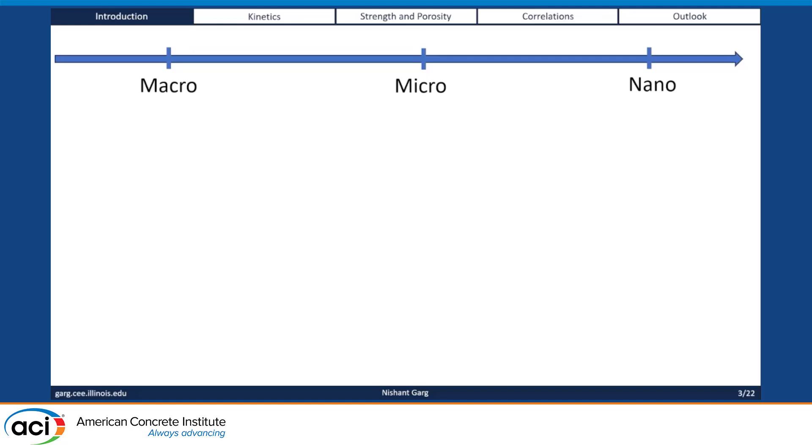All right, so let's get started with the technical things here. So we know that when we talk about different scales, we can have macro, micro, and nano, and macro is what gets used and placed in the real world.

Then micro is, if we consider the cement ingredient of concrete, it's really kind of a micron-sized material, and it's a mixture of, I like to call it, many different spices. It's a single-looking spice, but it's a mixture of many different spices, all micron-sized.

And then you can also go to the nanoscale. I don't have a picture for the nanoscale because you can't really see the nanoscale material, but I do promise you later on I do have some TEM images of some of these CSH seeds that we collected recently.

Our group has done a lot of work on the micro size, so I'm going to spend a few slides talking about it. There's a technique that we've been working on for almost now 5 years, which is Raman imaging. How it works is essentially you start off with this optical image of an aggregate of a granite rock specimen.

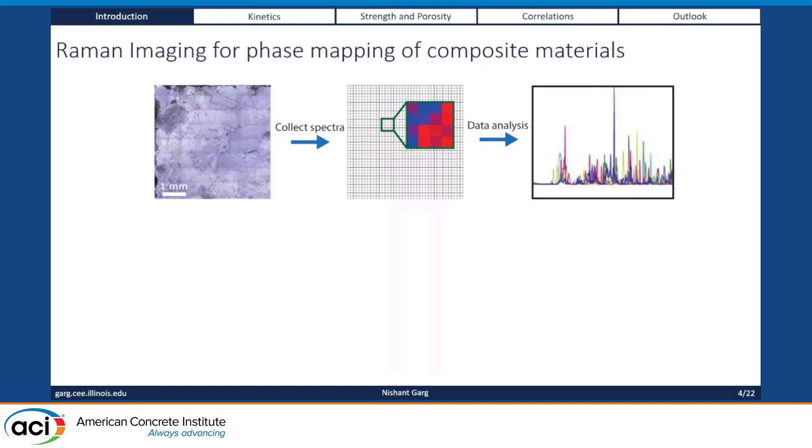And what you do is that you basically take these point by point, grid-like fashion spectra at different points in this map. And then you get a representative spectra at every location. This spectra you can then categorize and assign to different phases that are present, to get direct mineral information.

So kind of very similar to SEM EDS, but instead of getting elements, you get mineral phases directly. And then you can have a spatial distribution. The colors represent the different phases that are present. So in this case, you have quartz, feldspars, and so on that are in this aggregate.

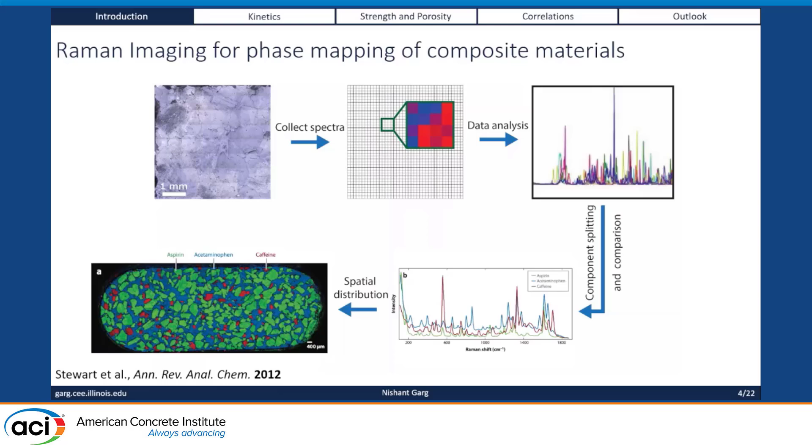And this is actually routinely done in many other industries. So here's an example, and I'm just going to blow it up here. Since I'm in the middle of a semester, right after this talk, I have to go and teach a class. So I'm going to ask you some questions here.

Can anybody guess what this material is? I can bet many of you have put this material in your mouth at some point in your life. Excedrin, right? So this is an over-the-counter decongestant, over-the-counter painkiller, or Excedrin.

You can see clearly you have aspirin, you have acetaminophen, which is Tylenol, and then you have caffeine. So the pharmaceutical industry already uses techniques like this to not only quantify the ingredients that they have in a system, in a pill - this is a cross-section of a pill - so that they have quality control, but also to see the spatial distribution.

So again, if they had bad quality control, and if all the caffeine was on one side of the pill, and if you're somebody like me who just breaks the pill in half and only takes half of it, I'll just get high on caffeine and not get the Tylenol, right?

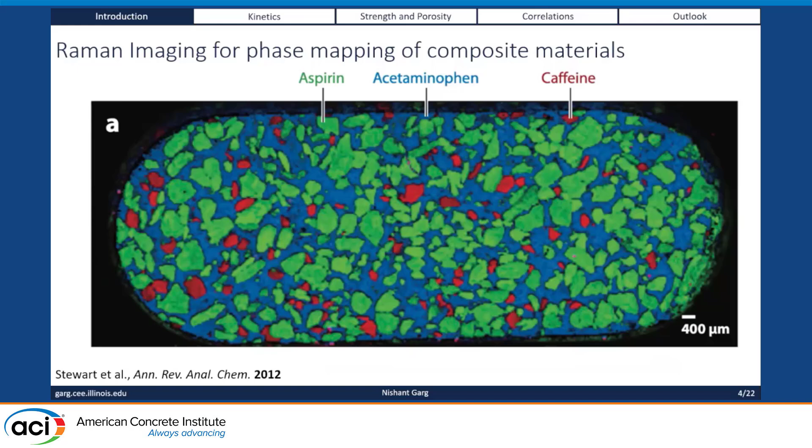Which you need when you're sick. So what we thought, well, why don't we do the same thing on cement? And people have been doing that with SEM-EDS for a long time. We want to do this with Raman imaging and see what we can get.

So we make this kind of a little pill, which is essentially cement embedded in epoxy. We get this very high resolution Raman image. We can quantify most of the phases. Each of these images that you're looking at has 250,000 pixels in it. So it's a really high resolution image at a large area, 5 millimeters by 5 millimeters, which gives us statistics that it can then correlate with the bulk XRD measurements.

We did this on a variety of 11 different cements from the US. We get a decent correlation. And we can then start to obtain these very interesting phase-specific maps, right?

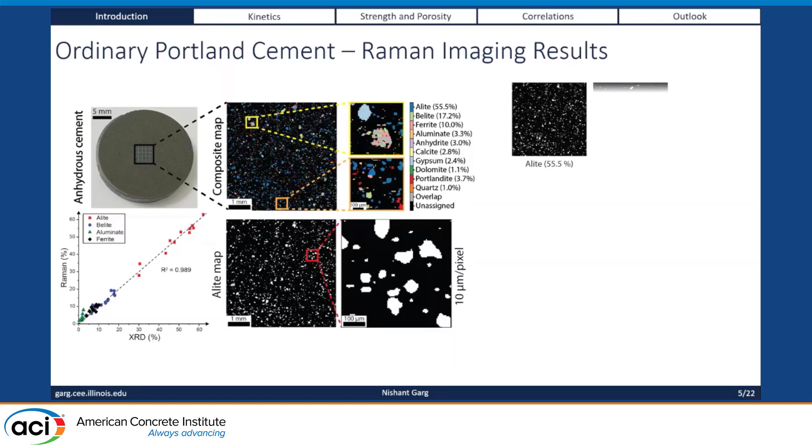So if you look at this here, you have now the alite map. This is a zoomed in version on the right here. You can start to see the individual alite grains in the system. It's kind of like looking at a Google map, and you're zooming in to that specific location. And then you can obtain all these different maps for all individual phases, even down to something like quartz, which is at the order of 1%, and you can quantify it, okay?

All right, another quiz, and you may get extra credit for this. Can anybody guess what phase is this?

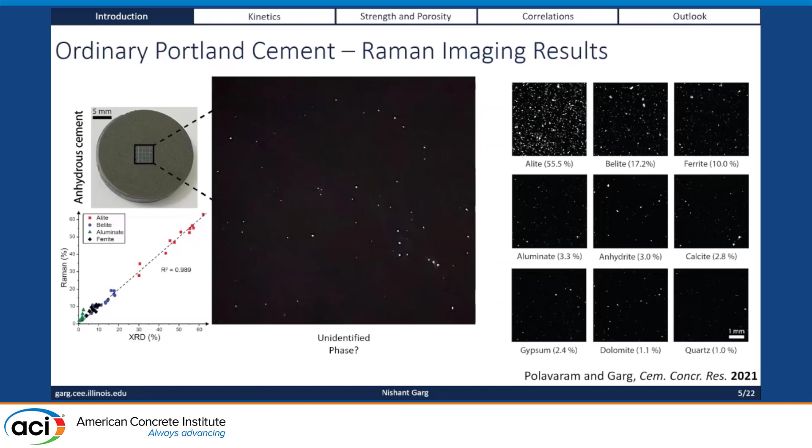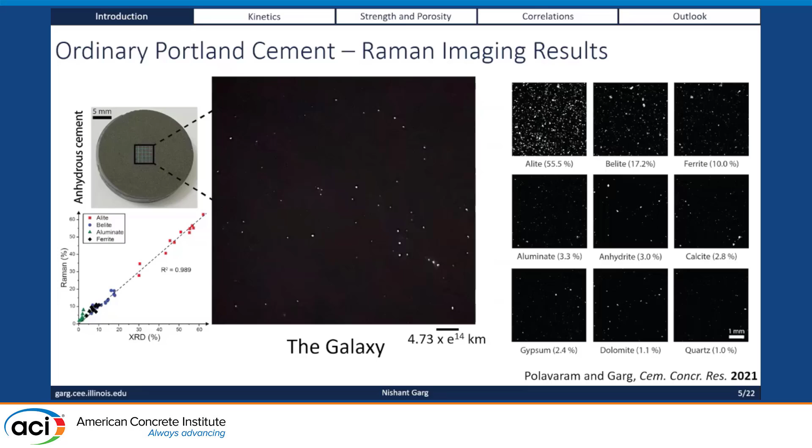So again, this is a bit of a tricky one. This is actually not a Raman image. This is actually an iPhone photo of the night sky that my student took. You can see that this is kind of very similar to what astronomers do. In this picture, the white pixels are the stars, but what we have in the Raman image are the stars of the clinker, the clinker phases. So what else can we get out of this?

Well, you can actually get the size and shape distribution now of individual clinker phases. Again, this is just a short animation of going through the different phases that are distributed in this image. And then you can quantify this through image analysis, and you can get what we call the phase-specific particle size distributions, right? So instead of having a global PSD, you can get the PSD for each component within the cement, all the way from alite down to calcite or quartz.

And the interesting thing for me now, the next thing I'm thinking about is, we hear a lot about type 1L cements and the variability and so on. It is possible, hypothetically, you could have two type 1L cements with the same amount of limestone, 10% limestone, but depending on the grinding done at the different plants, the fineness of the limestone in one cement could be different from the other, and depending on the PSD curve, you could have different water demand and different strength. So that's something that would be very exciting to figure out. So if you want to collaborate on that, just let me know. I'm looking to get more cement samples.

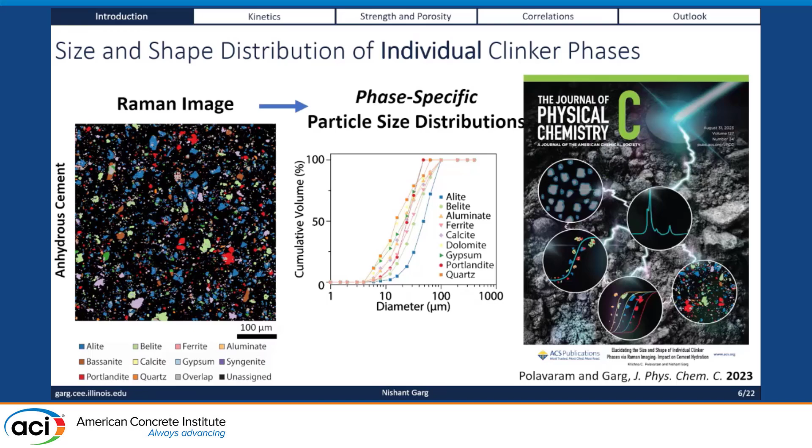Then you can get all sorts of other things. You can look at the shape. You can generally see that belite has a lower aspect ratio than alite, and we know that belite is generally rounder because it's softer, so it gets ground up like that, and we can now quantify that. This work came out last year in JPCC. It made it on the cover, so we are really looking forward to take it from here.

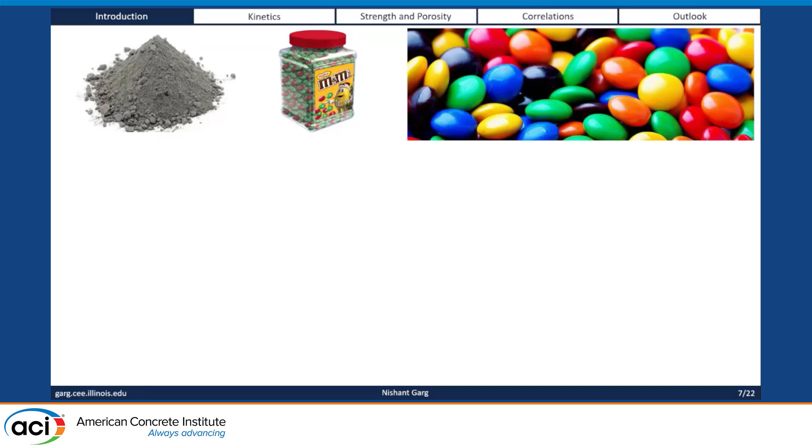How can we better understand this? I was trying to explain this to my kids, and I thought M&Ms would be a good way to explain them. If you think about cement as a box of M&Ms, you can think of all the cement phases as these different colored M&Ms. Here, you can think of them all being equal size and equally distributed, but in reality, they're kind of random, different sizes, different shapes, and different orientations.

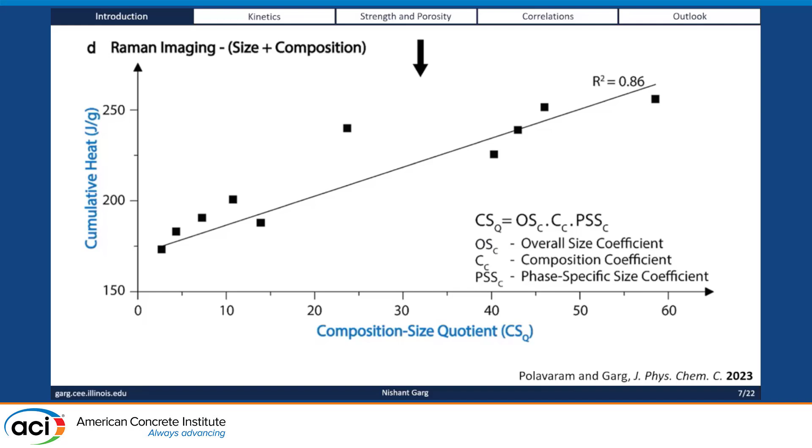Okay, I come back to the nano, and I know the session is about the nano, so I want to spend some time there, but I think there's a lot of room for optimization at the micro scale.

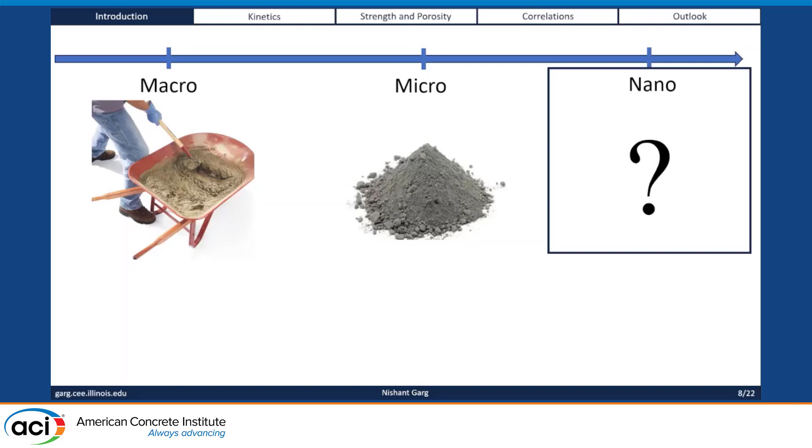If you consider the nano, one of the things we've been looking at was CSH seeds. It's interesting to see what's happening in the literature, and there's about 60 papers published annually on this recently. Some early papers in 2009 by Jeff Thomas and Alizadeh were the beginning papers. But it's not fair to look at just the papers with a particular term, you should also look at what's happening to the field.

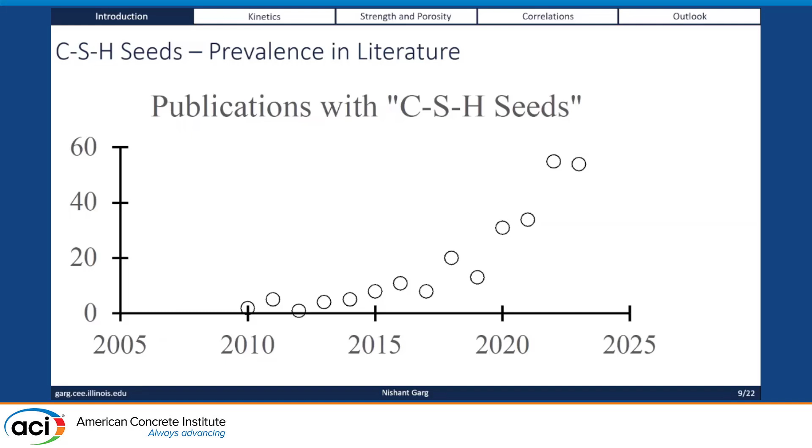Any idea how many papers we're publishing with the word cement in them? Just give me a number. 10,000? That's actually close. Anybody else? We can play Price is Right. 2001? 10,001? I think you saw my presentation yesterday. So 30,000 is the correct answer, ladies and gentlemen.

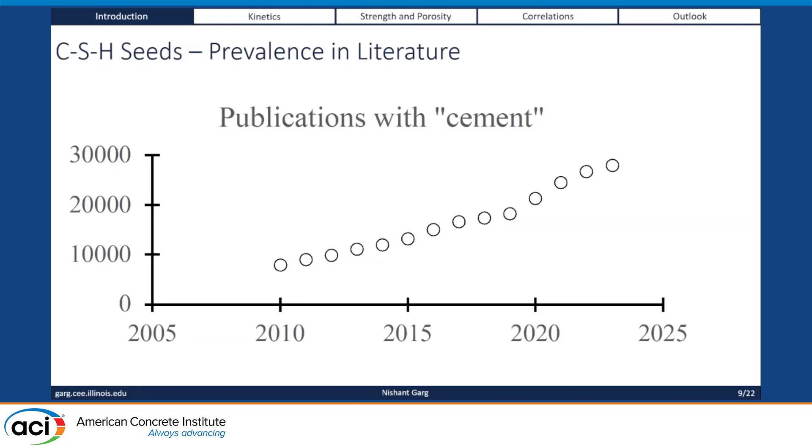So whatever term you're looking for, you should normalize it by the overall field, let's say in this case cement, though maybe I should have done concrete. If you do that, the normalized data shows currently 0.2% is the trend. So it is increasing, meaning there's a little more interest. And somehow this also matches with the dosage these guys recommend, so that's kind of a fun thing.

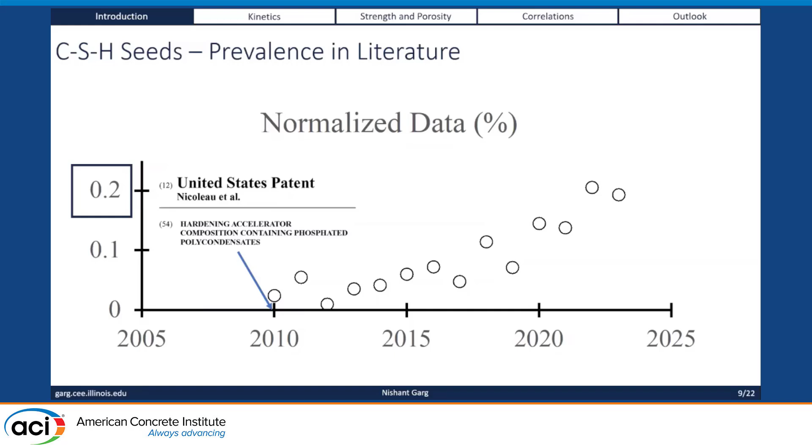Anybody know what happened around here, or what I hypothesize made things start to take off? One of the things was a patent related to these seeds by Luc Nicoleau that came out here. There were also early papers in 2009 that talk about seeding, they're not listed here because they don't have CSH seed in their title, but the seeding papers came out in 2009 too, along with this patent, and then things took off from there.

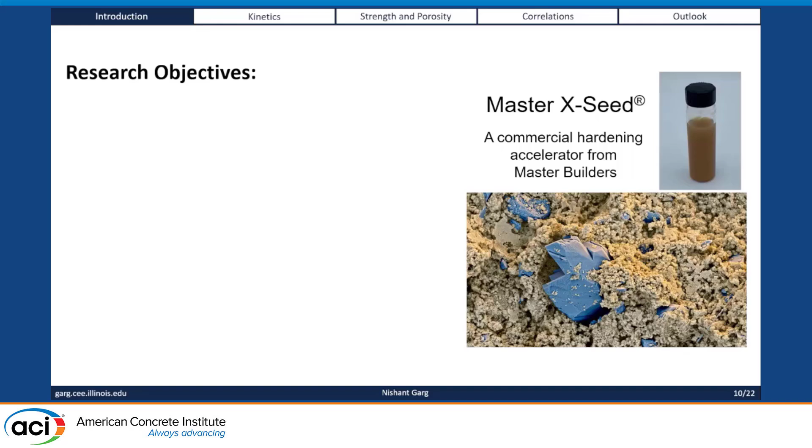In terms of research objectives, what we wanted to do here is look at a very commercial, off-the-shelf product. You can read off these research objectives. We worked with the Illinois Department of Transportation. Their main goal was to open the pavement to traffic a little early, and we thought one way to do that would be to accelerate or enhance the strength using off-the-shelf commercial products.

So I'm not going to talk about any synthetic versions or ones you can make in the lab. In the lab you can make a huge variety and really tweak the properties, but the goal here was to use what a DOT can buy and use. I also learned there are some restrictions on what's approved, so we did some tweaking based on that, and then we wanted to answer all these questions.

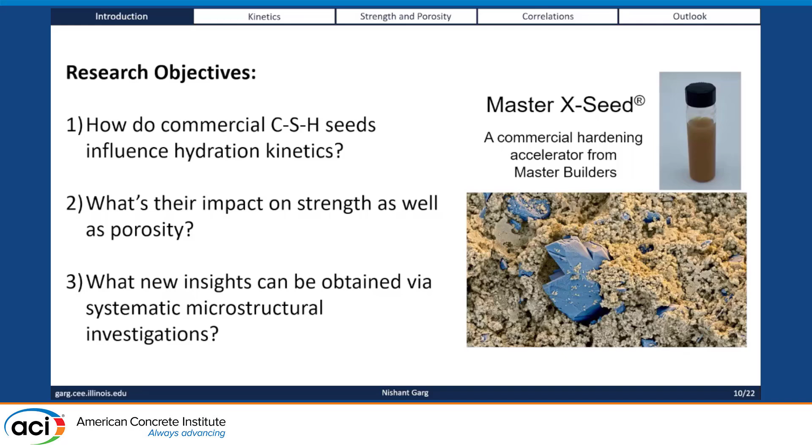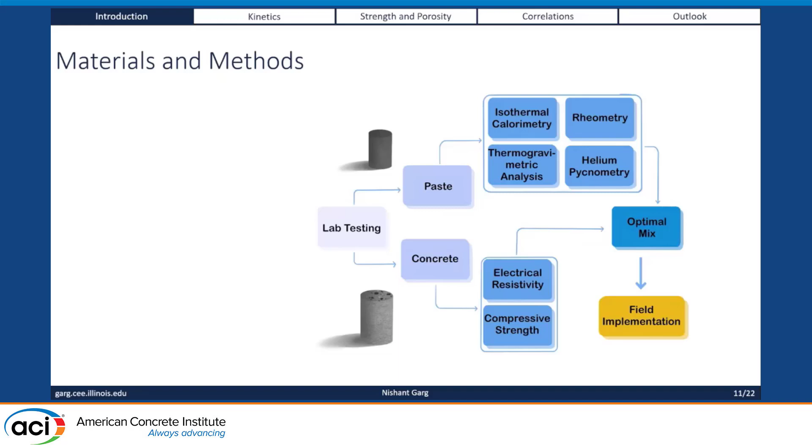We have a very standard lab testing protocol, and you'll see all sorts of standard tests, which were prescribed by the DOT, which we did, and I'm going to show here, along with a little bit of field implementation as well.

If you look at the kinetics from the ISOCAL, again very standard results, this has been reported in literature several times. Depending on the dosage, there's almost a direct correlation between the dosage and the acceleration that takes place. The cumulative heat also increases on the order of 15 to 20%, meaning the overall hydration is enhanced.

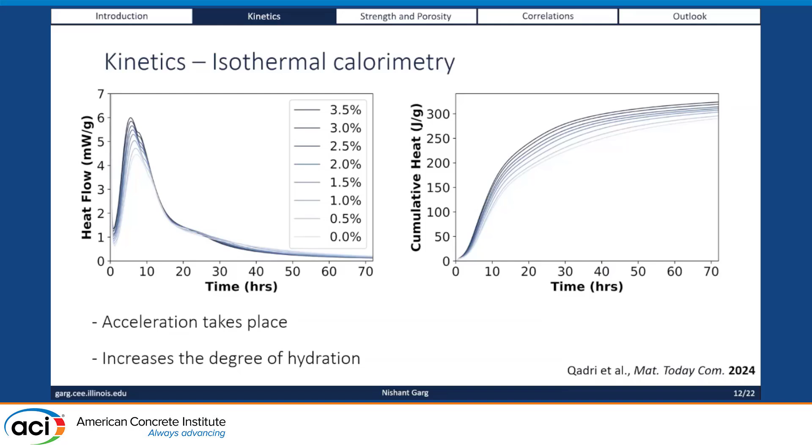If you look at the two admixtures here, you have the X-Seed 44 and the X-Seed 55. The interesting thing is these two admixtures actually behave slightly differently, one accelerates and one slightly retards the reaction, which is kind of interesting. What we understand is the reason is because of the amount of PCE and HRWR you have in them. But if you look at the overall heat, the cumulative heat is improved for both, which is good because that's ultimately what matters for strength enhancement.

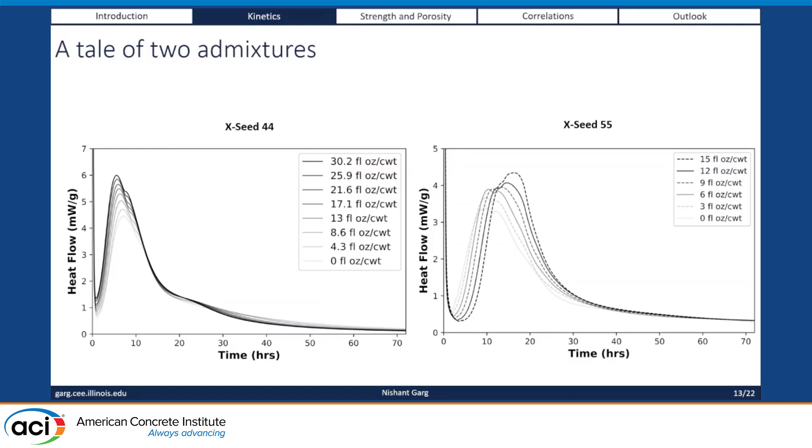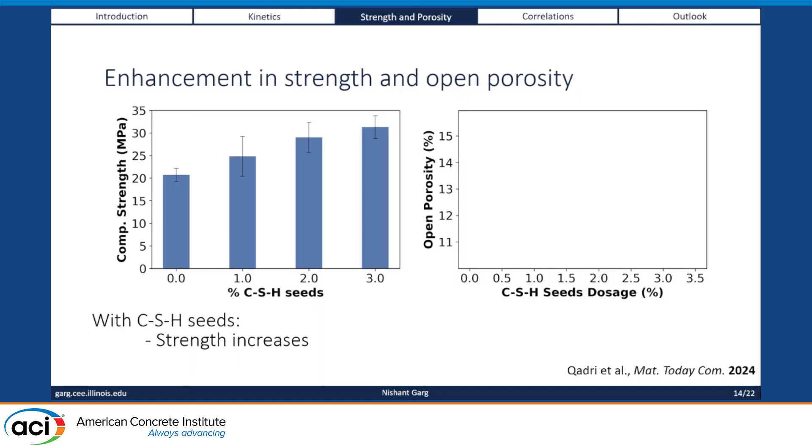If you look at the compressive strength, generally we see an increase depending on the dosage. The other thing I wanted to look at is the porosity. There's a lot of strength data in the literature but not much on porosity and durability. We find the porosity goes down by a few percent as measured by helium pycnometry, and after a dosage of about 1 to 1.5%, everything kind of plateaus. So the gains in porosity become marginal at some point, even though strength continues to increase. That's something to consider.

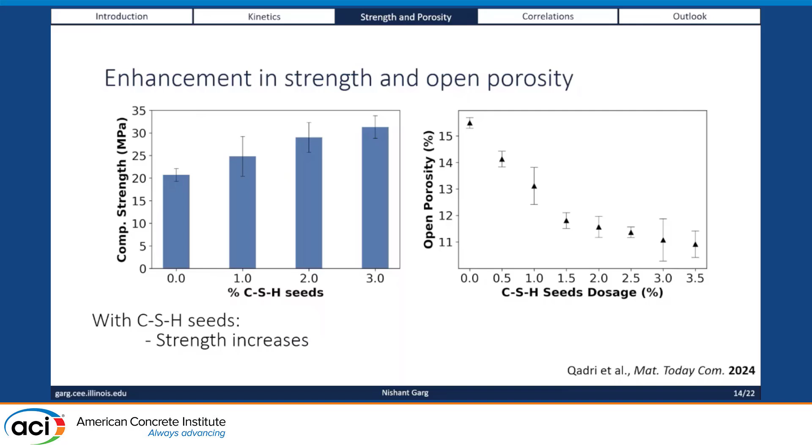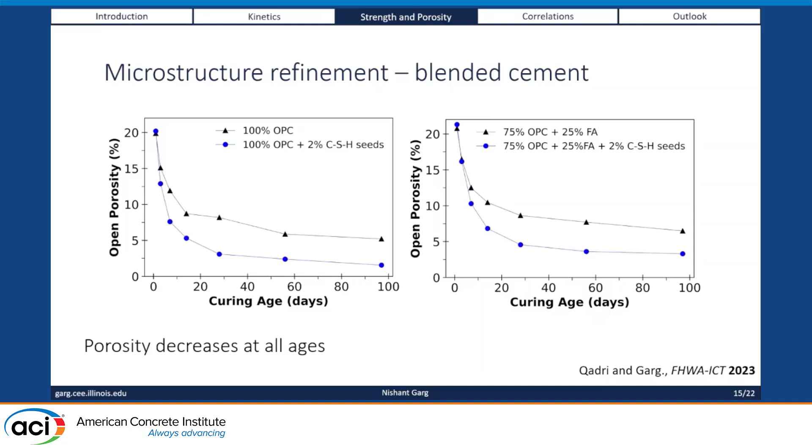Then the other technique we have been exploring to look at microstructure refinement is laser profilometry. Some of these newer profilometers are pretty good, with resolution on the order of nanometers, and you can build a very detailed 3D map of the surface.

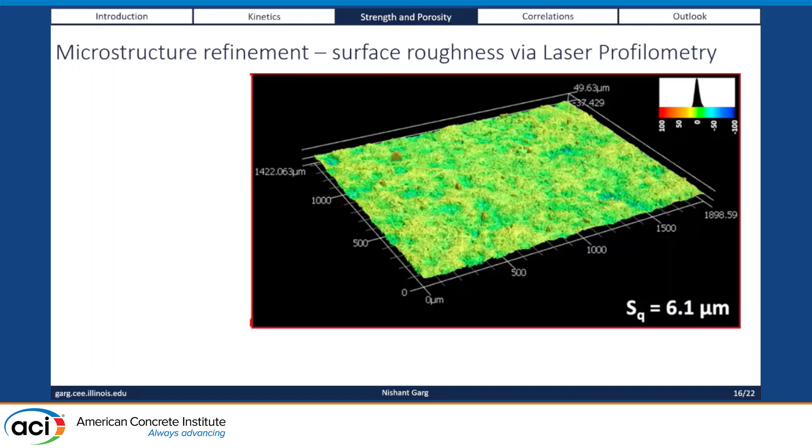What we have found is that the surface maps, if done properly and large enough, can actually correlate to the porosity of a system. There's a paper I'll mention at the bottom, an NPJ Materials Degradation paper from last year, where we found some really interesting correlations between the profilometry data, the surface roughness, and the porosity of a system.

I think this technique could have a lot of potential to explore. At this point, we just correlate two parameters: the peak curvature and the peak density. We find that it actually correlates with the open porosity from helium pycnometry.

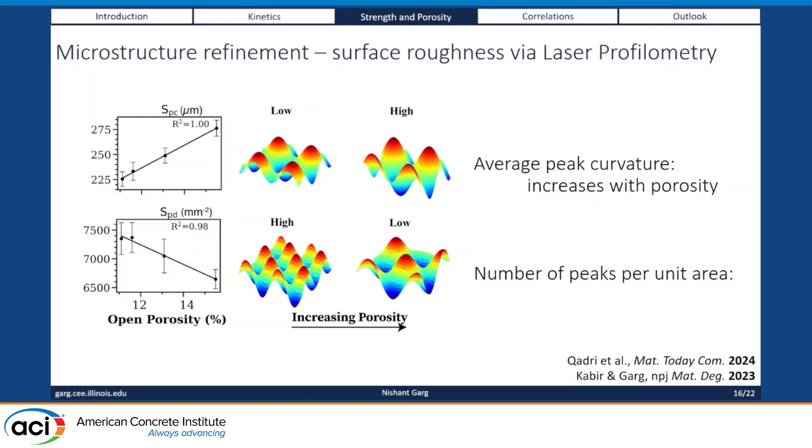I do a lot of characterization, and every time I find a correlation between two totally different techniques, it's like two people from two different places agreeing with each other, and then I think something is happening. So I think there's a lot of room here we should explore.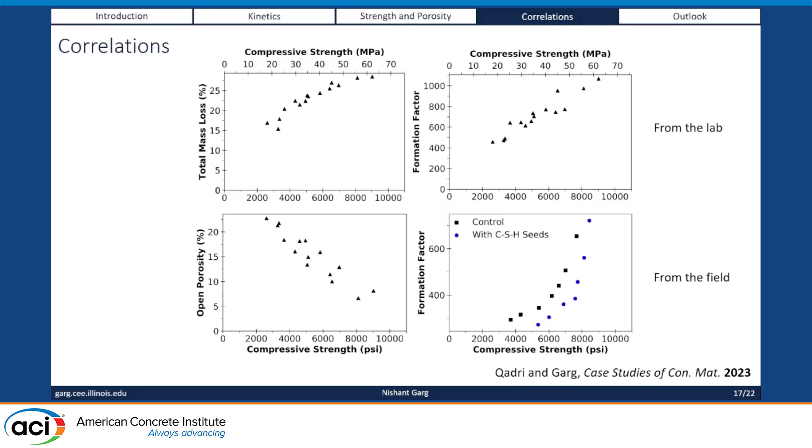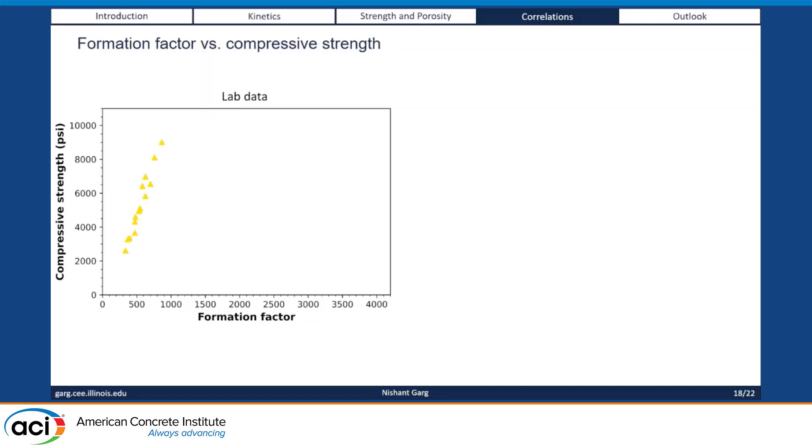And again, we had to do this, also out last year. The other thing the DOT was really interested in exploring was to compare formation factor versus compressive strength. There were some interesting things we learned: if you look at the lab data, you get almost a linear correlation between the two.

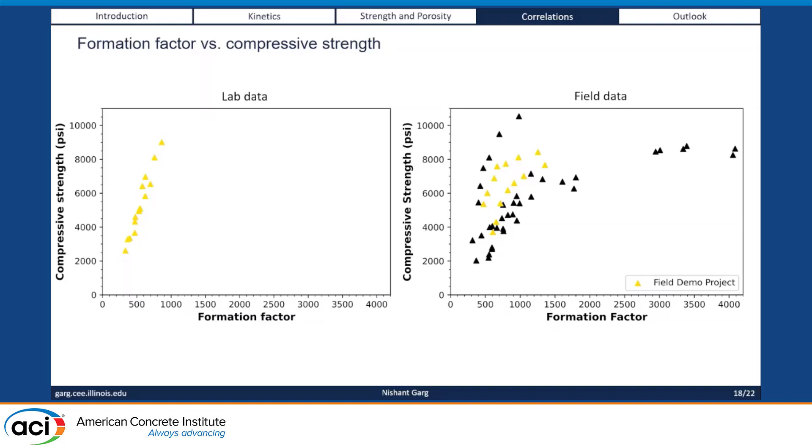But if you look at the field data, it's a little bit all over the place. Our hypothesis is the reason is because you have a cocktail of admixtures in the field, and there's the curing condition and so on—there's a lot of variation there. But generally, if you look at individual mixes, it does have a specific trend.

To be very fair here, the strength gain is on the order of 15 to 20%, so it's not going to be 50% or 80%, at least from these kind of commercial systems. If you make it in the lab, you can definitely make it super doped, but on the commercial system, this is the order of strength we're talking about.

So people are also thinking you can then reduce your cement content by 10% or so, and then get that equivalent performance and get a different GWP and so on.

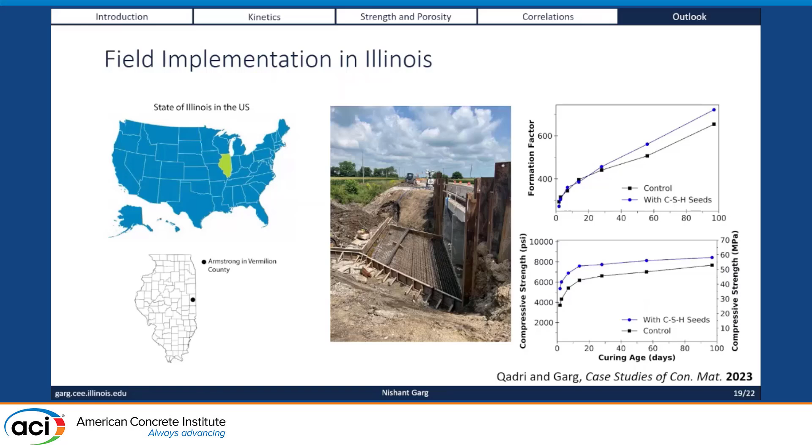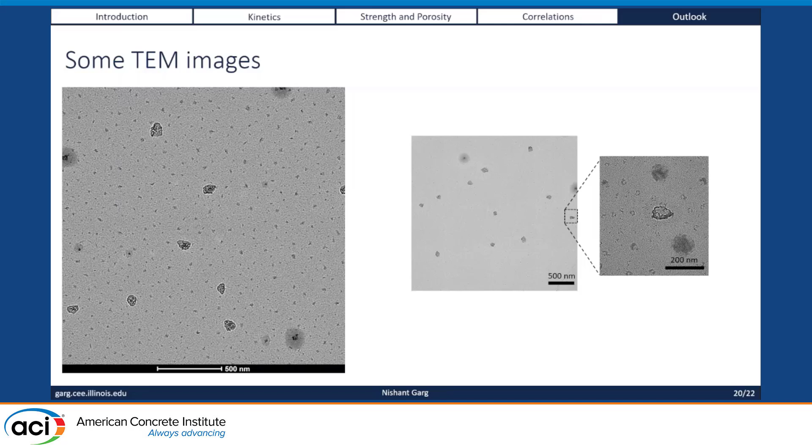If you look at the individual CSH particles, the images match pretty well what has been reported in the literature for synthetic CSH. If you do an X-ray diffraction on the dried version, you also get typical CSH peaks. So from that point of view, the purity and the dispersion is done nicely in this product.

So to conclude in terms of our contributions: the seeds can affect the kinetics depending on the dispersion medium, so you have to be careful in some systems. If you have a lot of PCE, you can have some retardation, but of course you also need that from a workability point of view. So the strength, kinetics, and workability is a trade-off.

Based on helium pycnometry and laser profilometry, there is evidence that we have this microstructure refinement, which is good from a durability point of view. So we refine this picture: you have increased hydration, but also the microstructure is refined. Finally, this is now implemented in the field and is fully documented as part of a report.